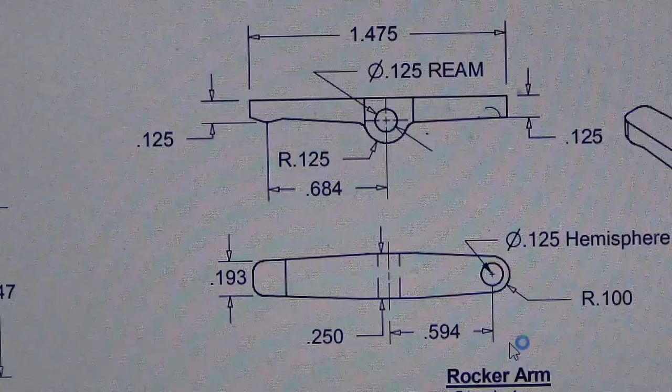So this is another project for my Hoglet engine, and this is the rocker arm, and this is what I'm going to attempt to start today. Actually, I already started some of it, but I'll give you a photo of where I'm at. But the section right in here is what I want to try to do today.

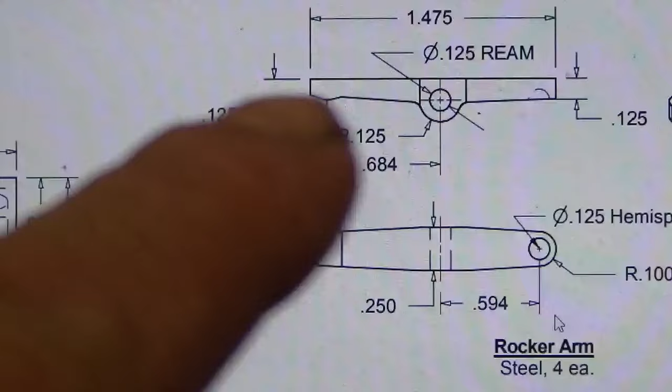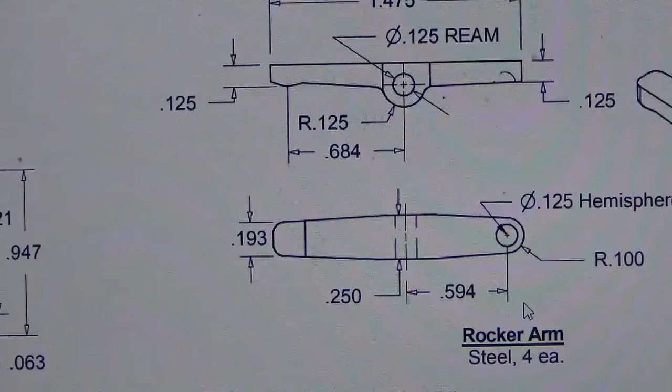The only real dimension that I have is the .684. There's no angles per se to even try to do, so I got the .125 thickness at the tip of the rocker arm, and I got the .684, and then I obviously have the full length. So what we're going to do is try to figure it out, right? Make it the best we can. Try to do our angles the way we make our angles, and go from there.

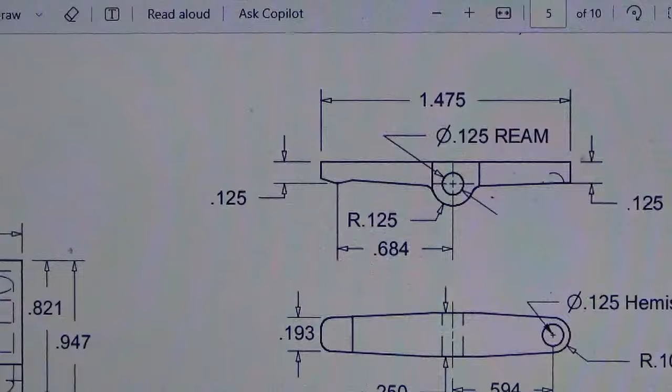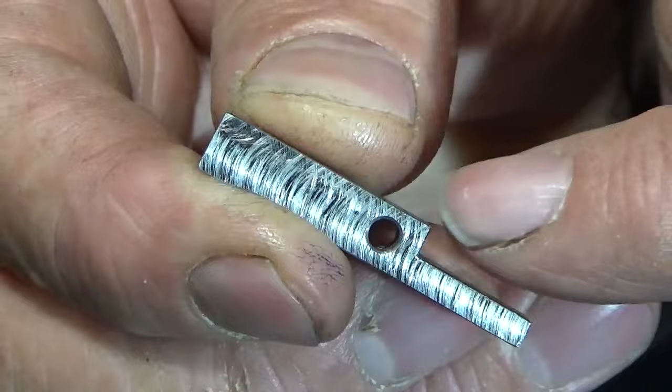So this is where I'm starting, and as you saw in the drawing, this end here is basically the flat side, and then right in there is going to be a little ball mill is going to put a little divot in there for the push rod to sit. And then this side here, I don't know why I'm upside down with the camera, that's why. This side here is where we're going to cut the angle and then leave on the top where it rides on the valve, and then we're going to cut a little relief on both sides.

So wish me luck. We'll do some edge finding and measuring and stuff like that, and try to get an angle put on there, and then we're gonna get after it, right?

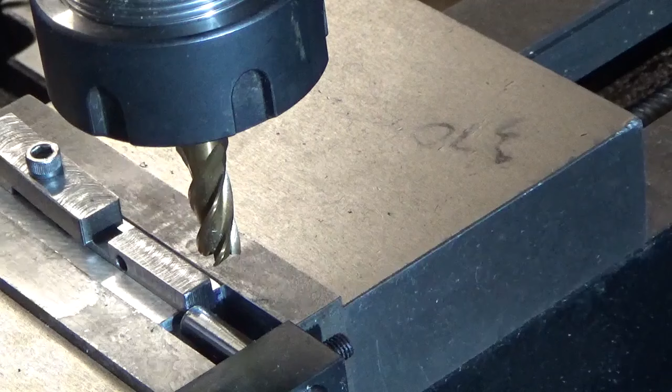Okay, here we go. So I've been thinking about how and what and when and what operation is first, second, third, blah blah blah, and I hope I'm doing it right. But...

This part here is going to have a radius on it, right here where the center hole is, and where it's at right now is the center where the rocker arm sits on top of the valve. Now what I figured out was there's going to be a 60-degree cut on either side, so it's just going to be a point, and then they had a small angle that ran from where the radius of this is to that 60-degree cut. I have no idea what that is because it's not really explained, so I'm just guesstimating it's going to be about 3 degrees.

So what I'm going to do is I did a lot of measuring and this and that, and divided this by that. Well, anyhow, what I'm going to do is move over. I'm going to take this whole end of this down to .125. .125 is the highest point where it rides on top of the valve. After I do that on all 4 pieces, I am then going to turn...

And then what I'll do is I'll do all the rest, and then we'll move on to the next piece. I'm sure you probably don't want to look at me doing all the rest, but at least you'll see what I got going on here.

Man, I just touched that stop. So, I don't know if you can see it very well, but that's our next part of our rocker arm.

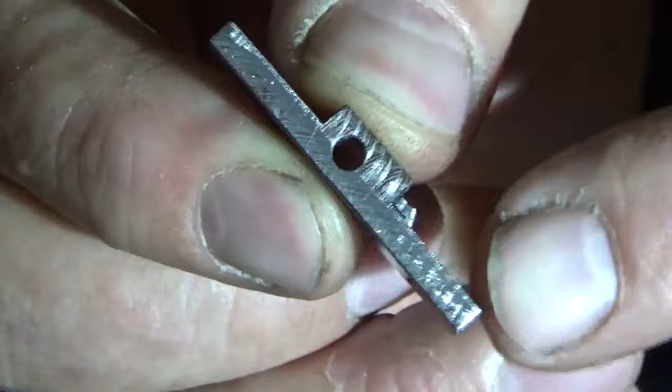Now, this side here is going to be angled, and I figured to angle at about 17 degrees. And then it's going to be angled this way. It's going to be angled both ways. There's just going to be a little tip right here. So that's going to be our next step after I finish all these other pieces. So wish me luck.

Well, I started without filming, and I finished the first one, so I'll show you how I did it. So this little jig I made came in pretty handy, and I'm not completely done.

Let's see, where the hell are we? Where are we? There we go. Come on, focus. Focus. There we go. Focus. Come on. Dang it. Why not? So anyhow, there's the cut.

Just for the tip. I don't know if you can even see it. It's about 17 degrees. And now I had to cut this section out here to give it a little relief on the one end. And I'll show you how I make the other tips.

So this is the first cut. That's not helping, is it? Just horrible light, horrible lighting. Yeah, there's the first one. That's bad lighting. I'm going to see if I can get some better light quickly.

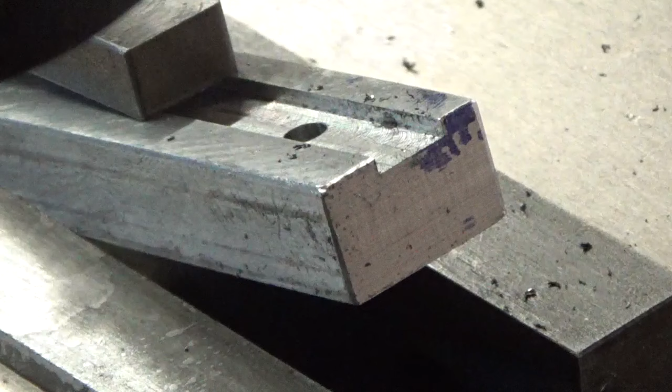Let's see what that does for us. Oh, look at that, come on, focus. Focus, focus, dang it, come on, focus.

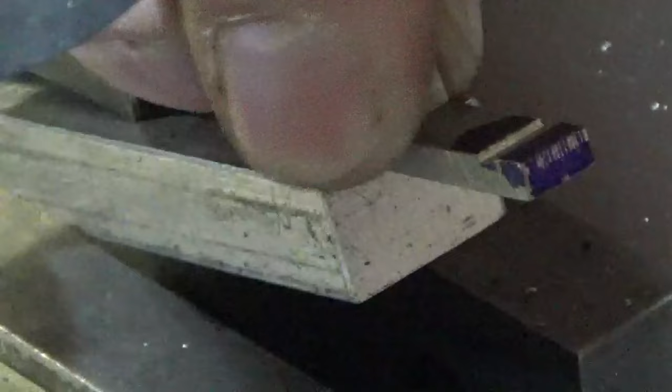So there's the first cut. It's just a 17-degree cut. And right where the blue ends, right there, I'm going to cut the other angle, and I'll show you what that looks like. I'm going to put it in this little jig and slowly nibble away until the blue disappears.

I bet you I didn't even get half of that in the picture. A little file, yeah, give it a little file, just to barely round off that edge.

Come on, focus, focus already. Why won't you focus? There we go, better than it was.

So angle, have a dangle. Once I get the rest of this here cut out, we'll be done. Almost.

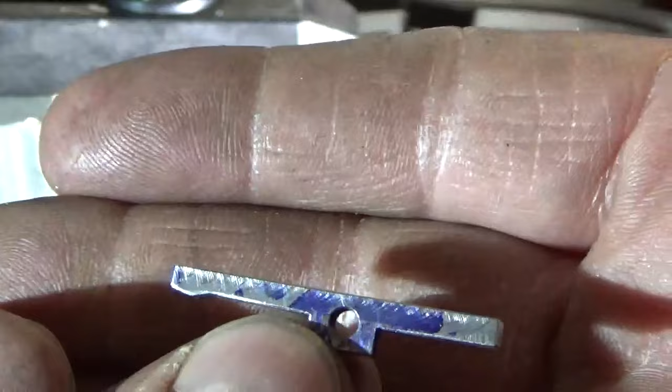Let's focus here. So this is what I'm starting with, these are my little rocker arms. According to the directions, they want this area rounded, a radius of .125, and I got it on a rotary table.

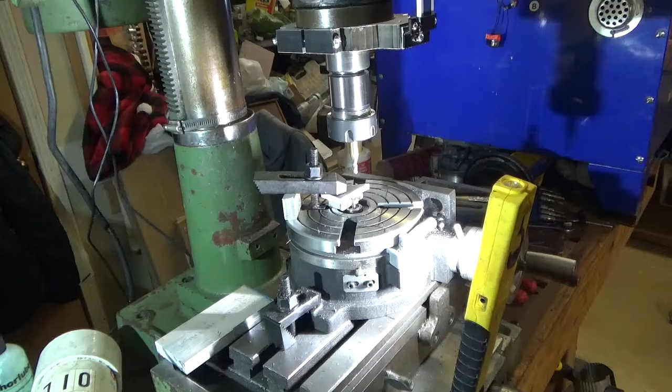So even though the wife knew I was doing this, she decided she needed to come in and say something.

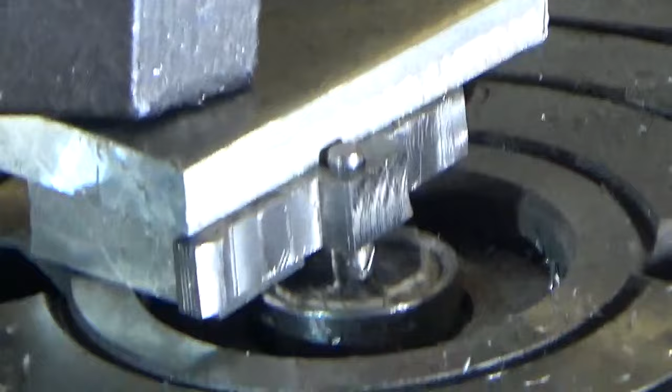So let's see what we can do about getting a good picture here. I have to move around some. That looks pretty good there. So as soon as the head comes down, it's going to block everything. Come on, focus, let's see here. That's not so good. That's better.

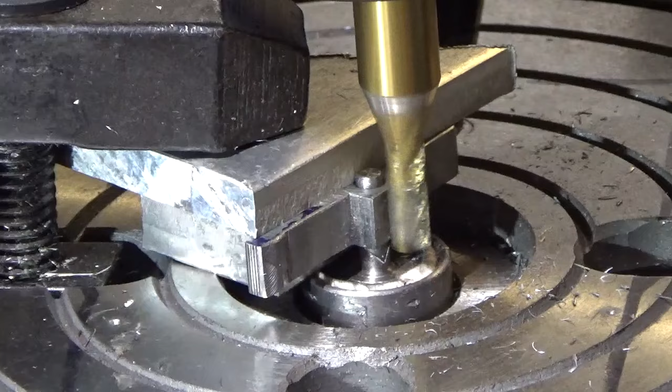So the head comes down, let's turn around all the way down below, get full depth. Okay, lock the head, take our rotary table, and now we're just going to move it around in a circle, get a little bit of smooch on there.

Where I need to change the light so I can see what's going on. And now you guys can't see nothing. So I'm going to back her off, clean off all this swarf.

See that little nubbin right there, I'm trying to get rid of that. Should be able to take this cutter right to the bottom edge of that rocker arm.

Looks like we're almost there, just a smidge more. You know, there's the lid.

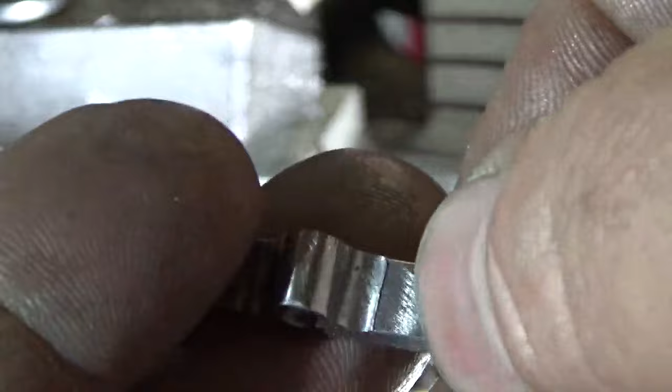So this is what came off up here. This looked just like all the rest of the pieces that I showed you earlier. Oh, there's our little rounded corner. I think I'll do a little file work in here. Probably don't even need to, but personal preference, I guess. Looks pretty nice, valve's going to ride there.

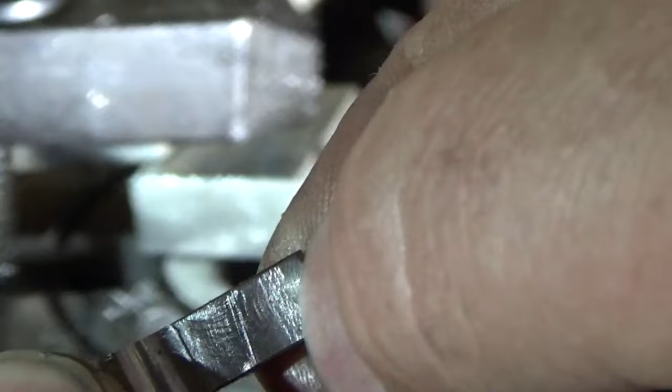I have to put an 1/8 inch ball nose or round nose cutter for the push rod end right in here yet, and then these will be complete.

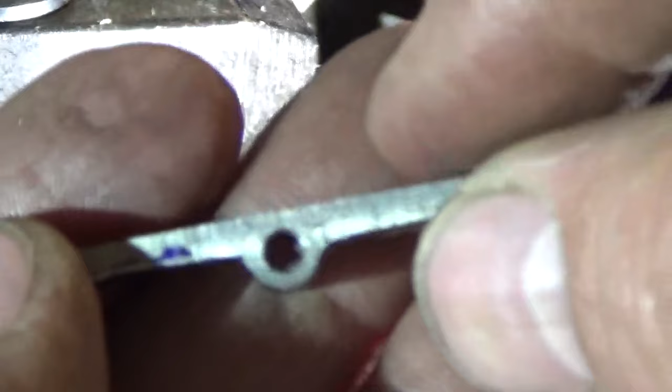So I'll finish all those up and show you the finished products at the end, I guess.

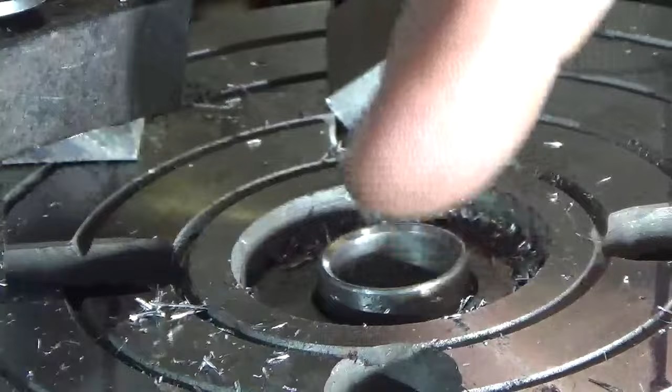So just a side note, this adapter is basically this thing here I made, it goes down inside a Morse taper 2, and then I have different fittings that go in here. I made this, but I made it a little small, so I had to make a spacer. And then I cut this stem about down to here, the size of that hole, and then I put a little step in it so it'll stay above the table, so I don't have to bring this all the way down to the table. So I know it probably means nothing to half the people, but somebody might enjoy it.

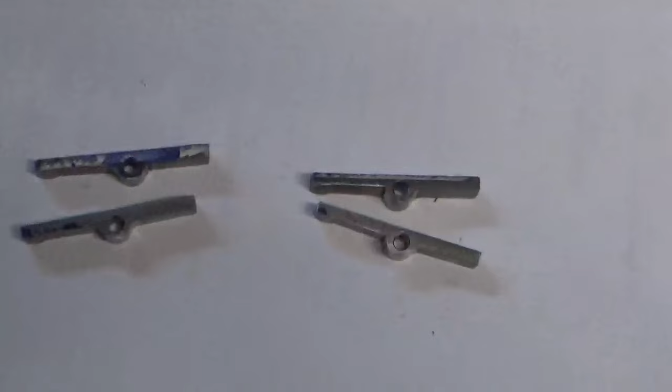So finished to this point. All I have to do is, in that little corner like I said before, use a little 1/8 inch ball mill, pop a hole in there for the push rod to sit in, and then my rocker arms will be done.

Tell you what, that sure looks simple, and I guess for a guy that would do it every day, they probably are, but I don't know. When you have to learn how to do it, and it goes well, it's a blessing, because you do have fun doing it then. But here we go.